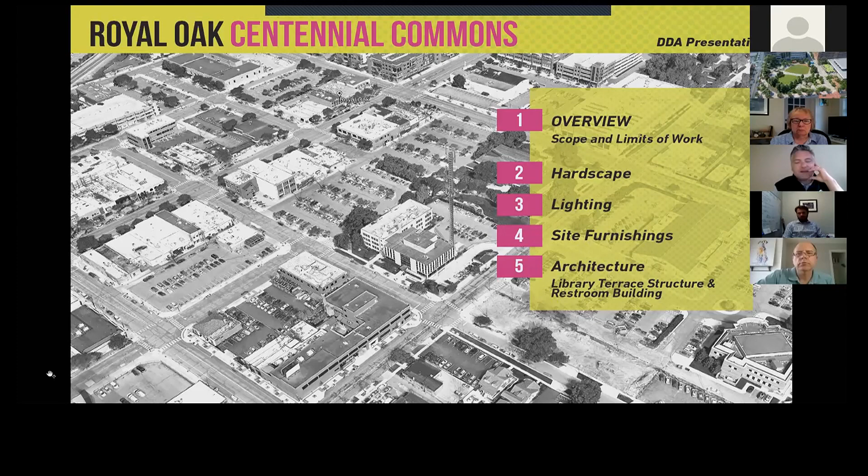Essentially what we've done is taken that concept design that we shared back in January. I think it was schematic at that level, and we've fine-tuned that and made it even better. All the elements you'll see in this—this is just kind of an outline plan of the CAD drawing, a lot of line work with score joints and things there.

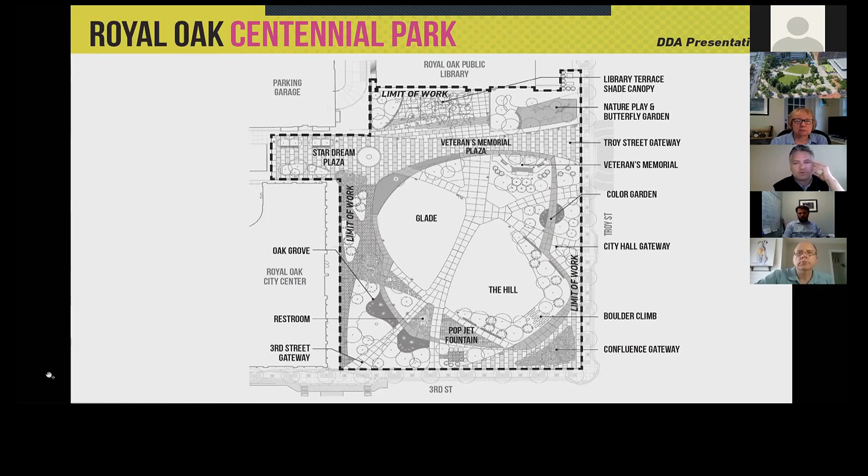But let's go to the rendering that we had done a couple weeks ago. It just kind of serendipitously happened with this meeting as well. We wanted some really good renderings to share the buzz of the project, and this meeting came up on the calendar, so it was a great opportunity to share these with you all.

All the programmatic elements that we had discussed all through the project—starting from community engagement, the charrettes that we had, what we'd heard at the food truck rally, and even working with the memorial groups—it's all still here, nothing has changed. We've only begun working on details, determining materials, which we'll go through later in the presentation. But really excited to share where we currently are right now.

We've got a couple of updates on some of the elements. The Library Terrace, for example, that phase was formally added since we last met, so we were able to advance it to the same level of design as phase one, which is the overall park. So we're looking at this all together now at this point.

So we've got De Leon and Primmer. Roberto De Leon will talk a little bit later about the architecture inspiration for the shade canopy there on the library terrace, and we'll also take a look at the restroom as well, that's adjacent to the pop jet fountain there for the convenience of families.

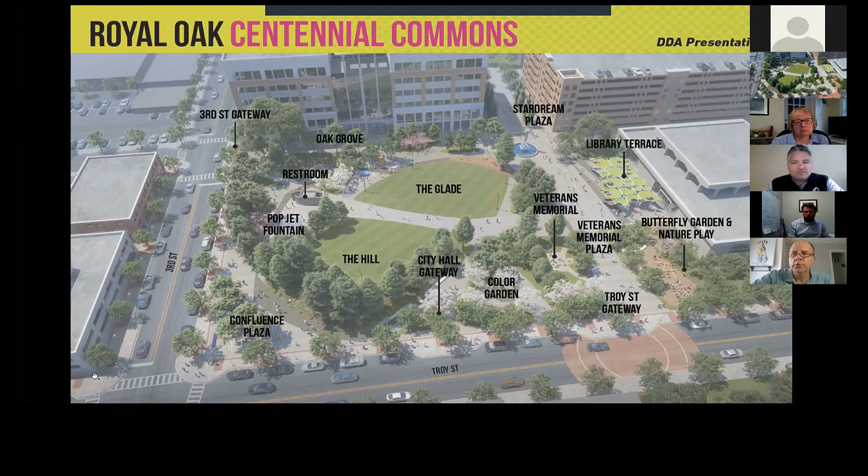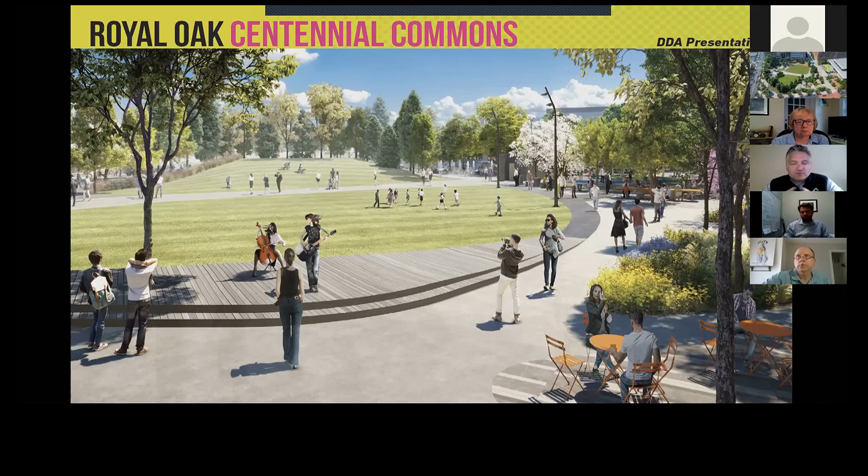So Kristen, let's go through a couple of other of these photos. You can see the stage here looking out over the lawn area. We've still got the hill within the plan, so we've got the topography changes. Lots of vegetation—we've done everything we can to keep as much vegetation as possible, so we get a lot of seasonal color and shade, and in this hot summer we've been running from shade to shade, so making sure we keep that within the plan. Then lots of activity surrounding this open glade in the middle of the park.

Let's take a look at the next slide. This is a view from the library terrace, looking down onto the promenade with the shade canopy in the foreground. So again, we're really excited.

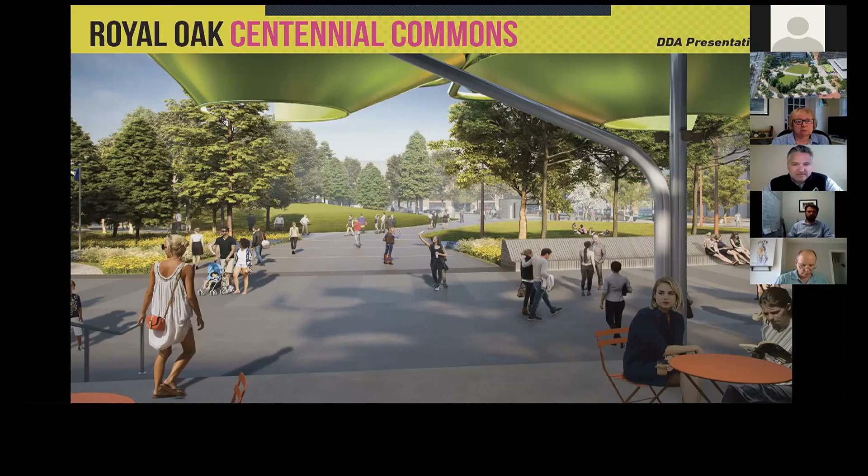We've got a lot of great details to share with you. Kristen and Haley are going to co-present some of that. They've been leading since the 30% design, really taken hold of this and advancing a lot of these details, working with Justin and Jen from F&V with De Leon and Primmer. It's been a really collaborative effort. We've also been in close contact with Aaron and John from the city, with regular meetings with them. Excited to share some of the updates with you here.

So this slide represents what we're calling the perimeter path. This is exposed aggregate and integral colored concrete. We wanted to have some contrast for this path from the rest of the more standard colored concrete for the remainder of the site, so it really pops out and has a different color to it.

Just to add on to that, Kristen—that perimeter path came from an idea from Emily at the library. She was really interested in having some sort of path that she could take her kids along to go through these different landscapes, possibly adding some signage within this for educational purposes. Also, the ring kind of derived from the outer ring circle of an oak tree.

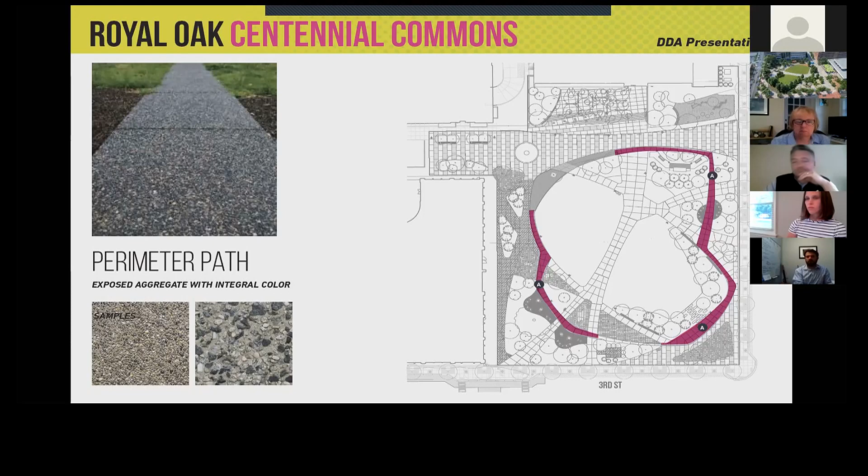Next, we have our unit pavers. These are concrete unit pavers located in seating areas. We have 3 primary areas where the pavers are. There will be movable tables, chairs, and trees as well, so it'll really be an interactive space where people can come and spend time and sit. They are also representative—there's a theme from the perimeter path carried through. This pattern is a DNA pattern; we've used the inspiration of an oak tree's DNA to create the pattern in the pavers.

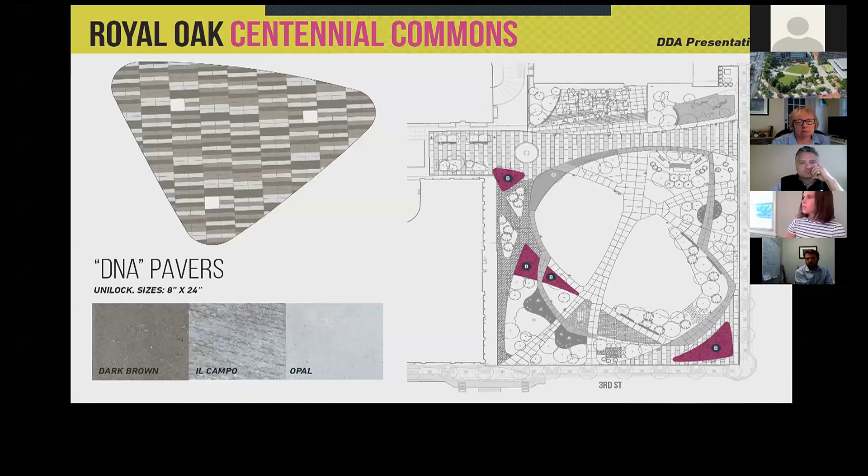Next, the bulk of the site is concrete pavement, and as I mentioned, there are different finishes where we have this banding or striped pavement. It is standard concrete with a buff wash or architectural finish to give it a crisp, nice finish, with seeded aggregate—black basalt seeded aggregate—that gives the banding the contrast you see here in the plan. The rest of the pavement is just a buff wash finish, standard concrete, for the remainder of the park.

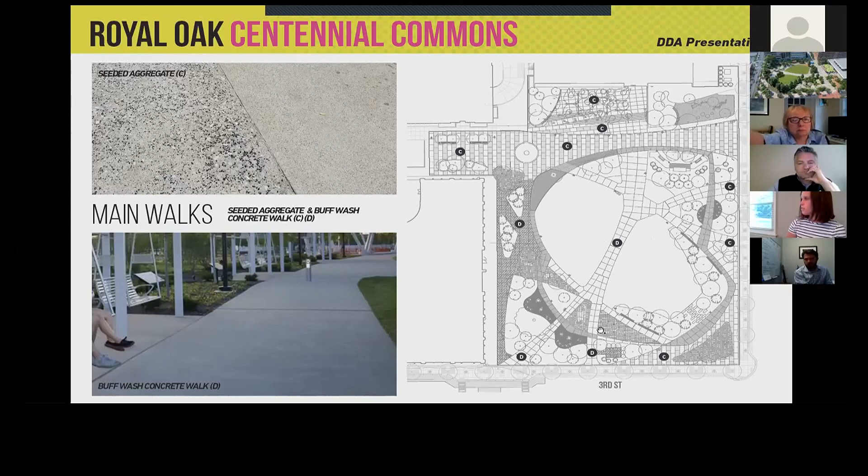So at the memorial, we have a second type, a very small amount of square footage—just over 200 square feet of cobble pavers. They are ADA accessible, but also have a texture to them for skate deterrent. So rather than raise the memorial, we've got about 8 to 10 feet, a pretty good stretch, of the cobble pavers to deter skateboarders.

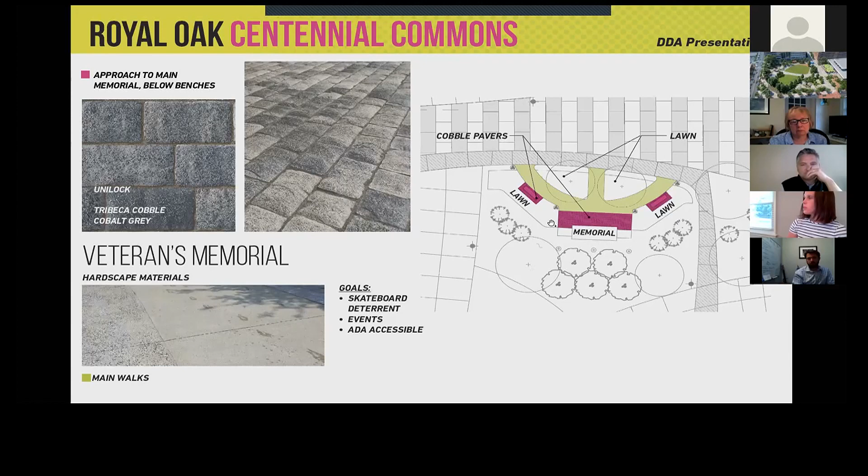And I am going to turn it over to Haley to talk about lighting.

Thanks, Kristen. Across the site, we try to address the different needs of each of the areas. Since this is a pedestrian scaled area, we wanted to have pedestrian lights throughout, shown there in yellow. We also have taller area lights for more of the event spaces, shown in blue, and those will be 25-foot poles with movable heads in several directions.

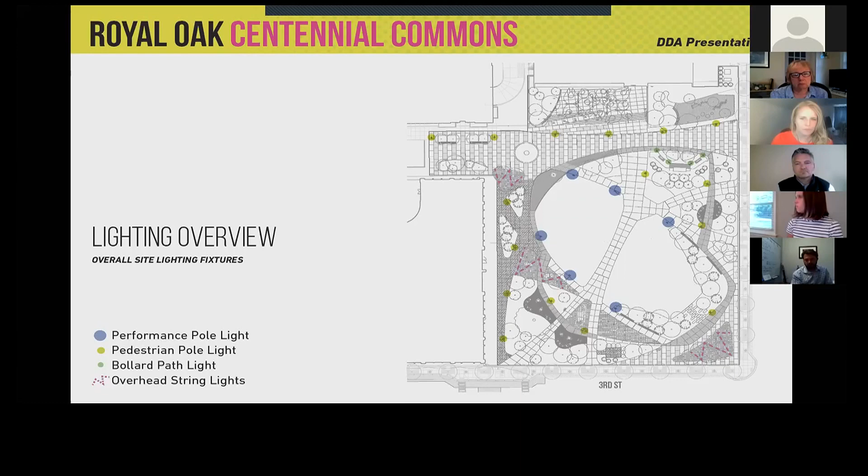If you go to the next slide, we can get into more detail. So here you can see those two that I mentioned. With the pedestrian lights, we wanted something that wasn't a globe fixture, which you see throughout the city, but something that would complement it. So this fixture really reduces the glare when you're walking around the space.

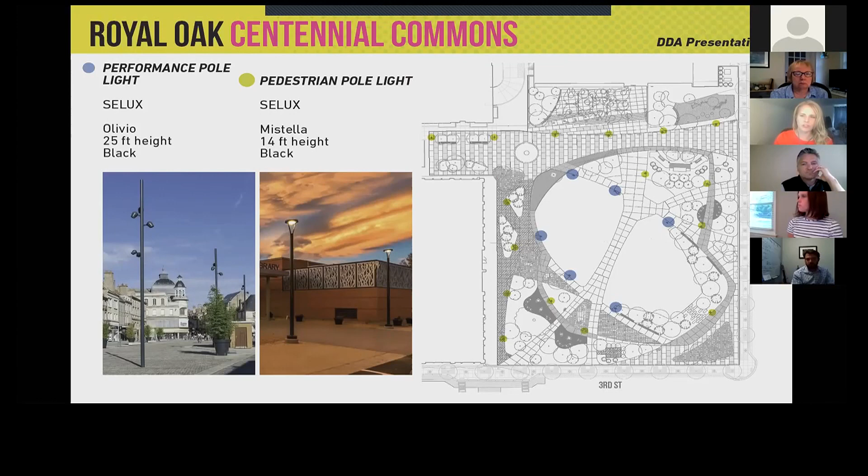And the next one. So a couple other lights we use around the Veterans Memorial area - we use a bollard light, which is more of a low path light. We think this will help to uplight and just have a nice ambiance to that memorial area.

And then for those plaza spaces that Kristen mentioned earlier, we are suggesting overhead string lights, almost like a festoon light, that would create those kind of cafe spaces and just add a little bit of whimsy to the area.

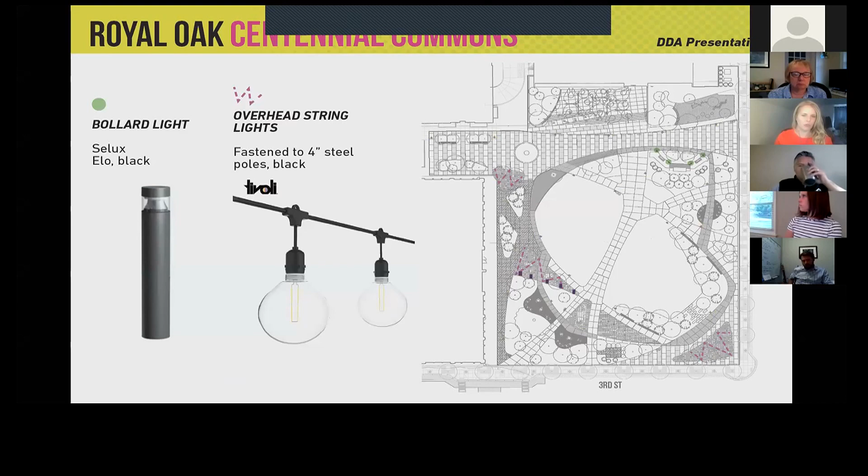The next one: site furnishings. As you can see, a lot of furnishings are used across the site. This was an opportunity for us to program those spaces into what we assume them to be used for, but also add a lot of punches of color that would complement the Royal Oak branding and also provide that whimsy that we'd like to see.

Some of our bigger furnishings - this is a built-in stage. You can see here it's about 1 to 2 feet, 2 steps up. But we wanted to ensure that at least one side of it could be ADA accessible, so if you go over to the right there, we kind of blended it in with the surrounding concrete.

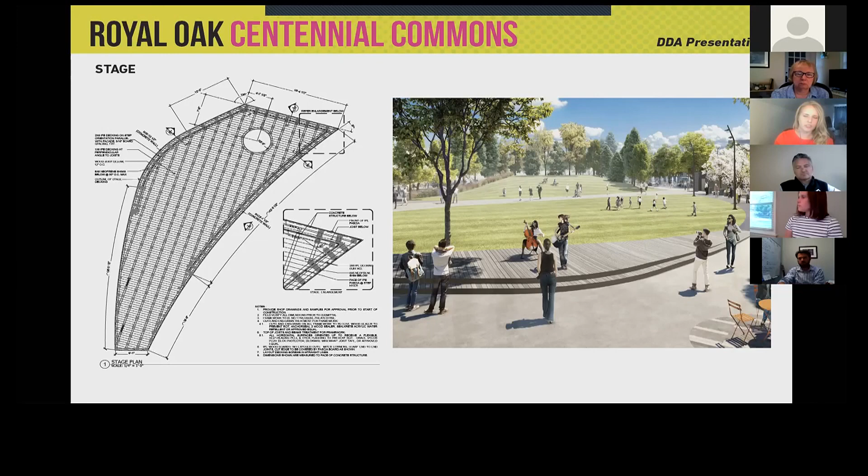Next slide - a couple of other custom items that we have designed. You can see to the left here, it's a curvilinear bench with a cast-in-place concrete base with an Ipe wood finish up top. This is extremely durable wood - you need special drills to drill into it. And then the feature bench, as you can see, is like a lounge type shape. It would really be a signature piece to this area of the park, and that is also covered in that Ipe wood slat.

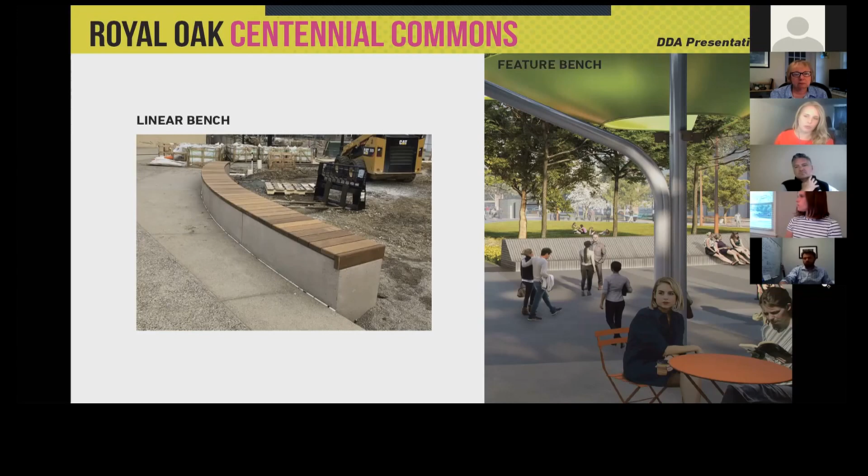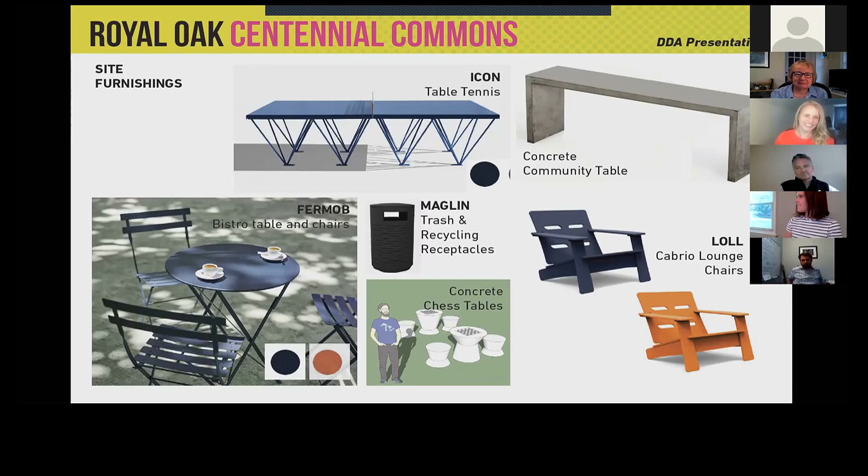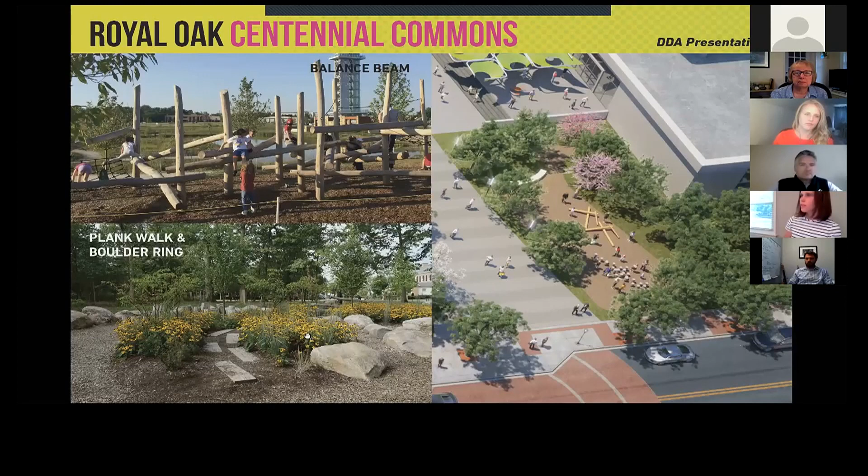Okay, and I guess I'll say next on the slide, whoever's... okay, if that's what, yeah, I'm not sure if we can share.

That's totally fine. Okay, so for the architectural components, we're going to talk about the canopy first, because that is probably the latest of the elements as far as development. I'm going to talk a little bit about how the design came to be and the precedents for that.

So much like the rest of the park thematically, the architectural components also draw on the precedent, largely inspired by the oak and the oak leaf in the case of the canopy.

That's really where we started with the canopy, looking at the defining characteristics of the oak leaf, starting with something familiar, and then transforming that into something more whimsical and abstract, but still keeping these defining characteristics of the oak leaf.

A key part of the oak leaf's characteristics are these deeply lobed, curvilinear elements. Also, the leaf itself is quite sculptural and three-dimensional, with an undulating surface. These deep lobes and the undulating surface are where the canopy design is drawn from.

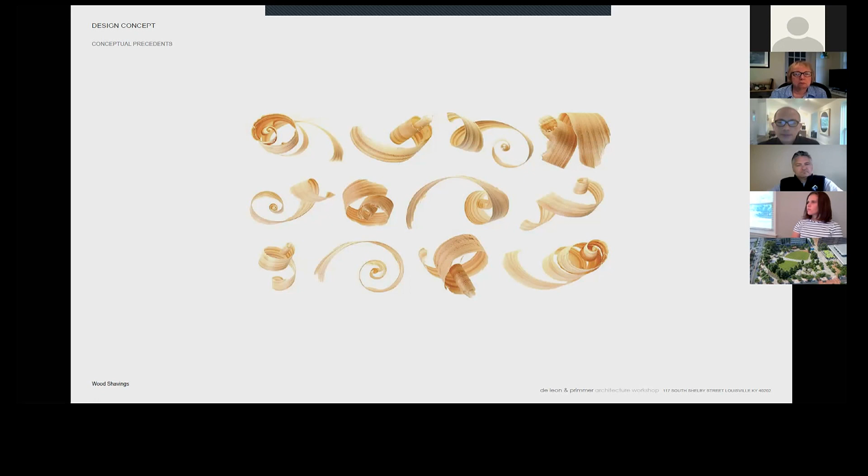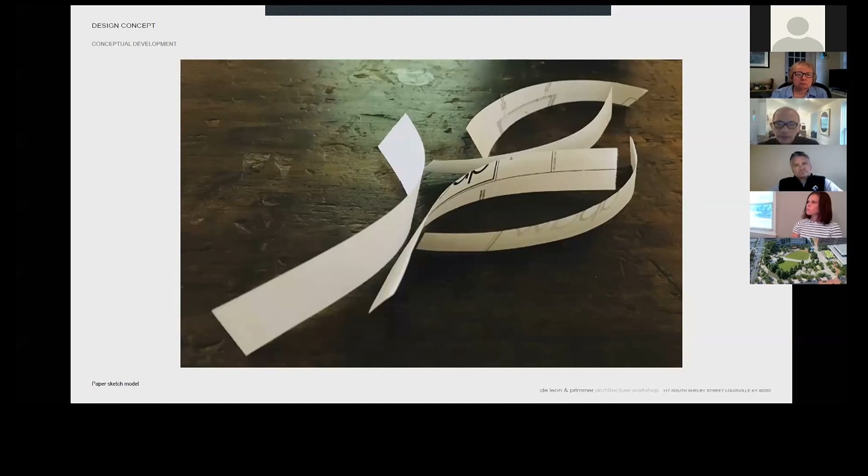These are very early concept models literally out of paper, trying to think how we can build this in the simplest way possible, even though it may look complex. We began to look at ribbons, imagining them as colorful steel ribbons, then developed that into a further iteration of curlicue shapes, again thinking about the deeply lobed leaves of the oak leaf and their three-dimensional quality.

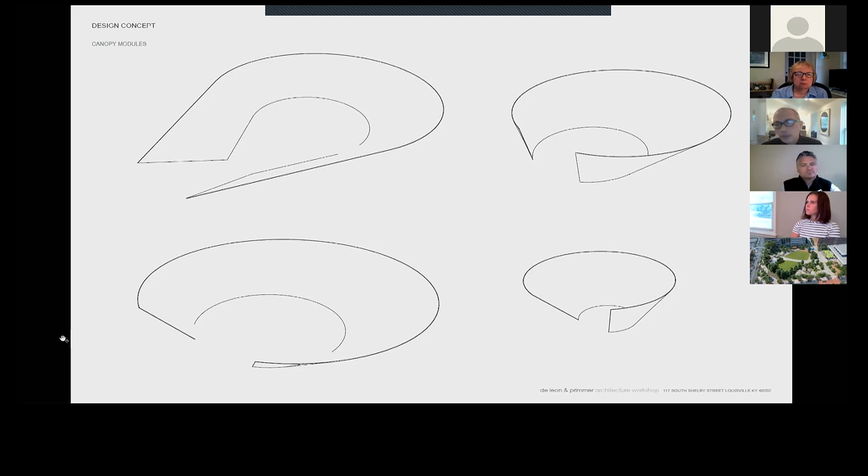In this next iteration, what we were after was creating larger areas of shade, so when we aggregate them, this is what it tends to look like — a kind of dappled shade underneath the canopy, evoking the quality of being underneath the shade of a tree.

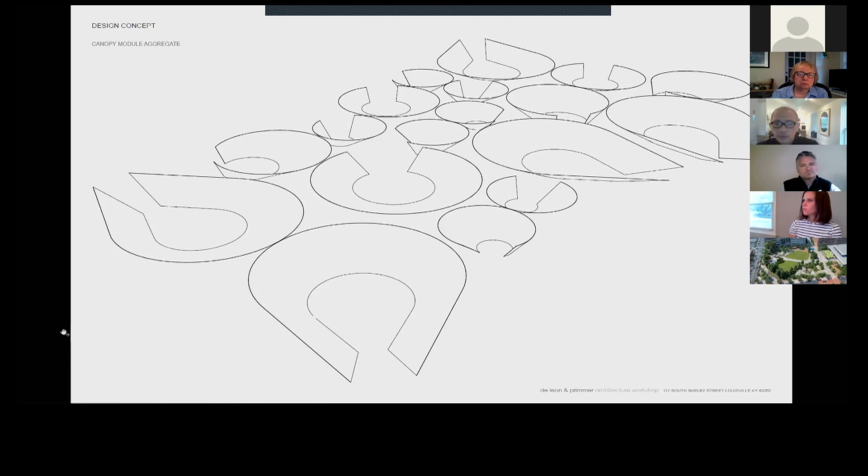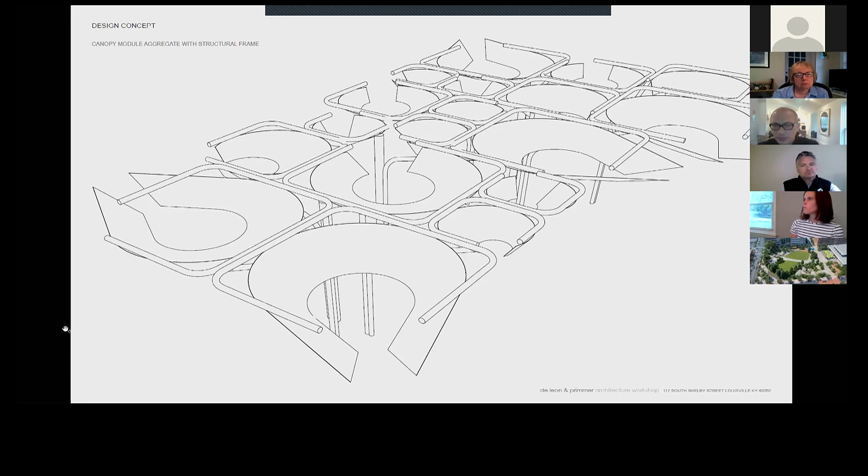These ribbons are then suspended from a series of bent steel beams. The key component here is that even though this looks complex, it's actually an aggregate of three sizes of modules of steel ribbons, beams, and columns — a repeated series of modular elements.

What we're after here is this dappled quality of shaded light underneath the canopy, but also we're trying to minimize the amount of columns it's supported by, maximizing the flexibility of how the space underneath can be used.

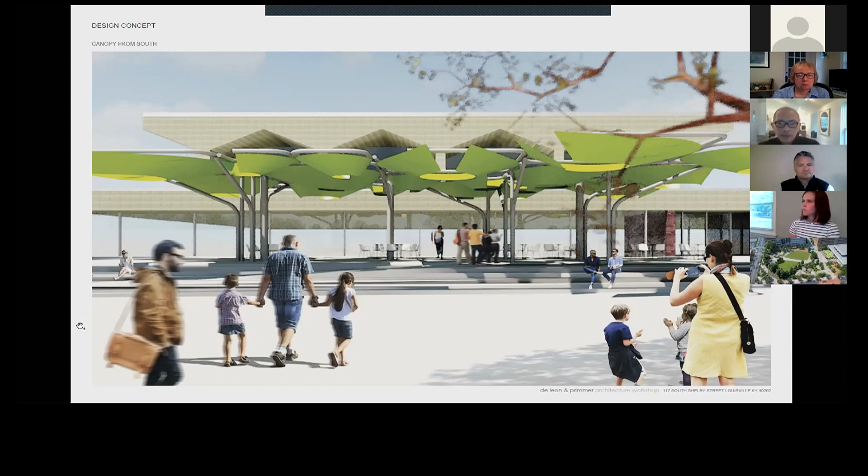And then the smallest of these is 8 feet by 8 feet. This may be hard to get a sense of scale, but when you think about 8 feet by 8 feet, that's almost the size of a small room.

Again, we were trying to look at not just providing shade, but also a certain amount of square footage for actual rain cover. Within this total square footage, we have a little over 1,400 square feet of actual covered canopy space. That translates to rain cover for about plus or minus 97 people, allocating about 15 square feet per person. So there's a generous amount of rain cover underneath this canopy.

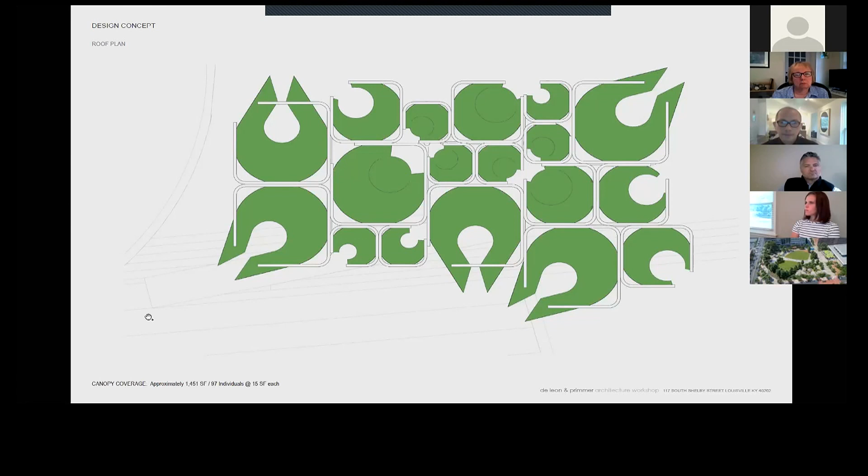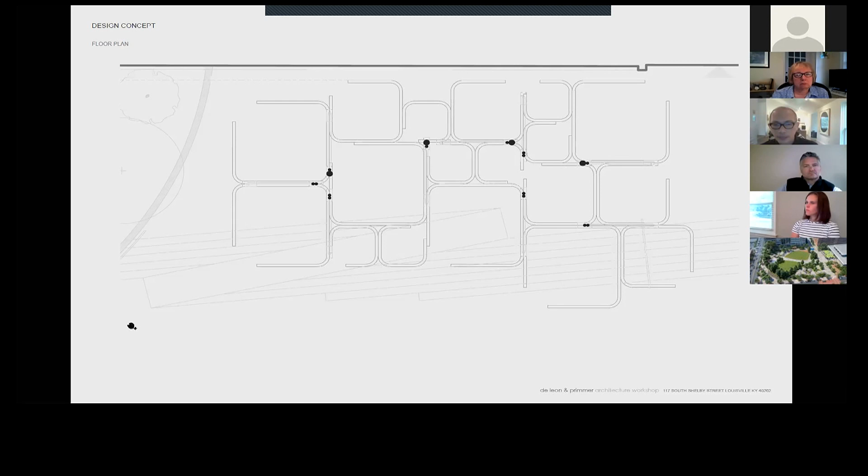Next slide. This is a floor plan of the terrace, library terrace floor. The darker dots you see are where the columns land down onto the terrace surface. We're trying to minimally touch the terrace floor and maximize the flexible use of the terrace area. The squiggly lines in lighter shade are actually the beams above, not on the ground surface, just a frame of reference, so you can see where the canopy or ribbon elements are supported above.

Okay, next. We can go through these very quickly, but these are more dry drawings. We wanted to show you the thinking through the development of this canopy element, looking at an abstract or organic shape that looks complex, but in reality is a series of aggregated modules. This is just a series of floor plans, roof plans, and a reflected ceiling plan.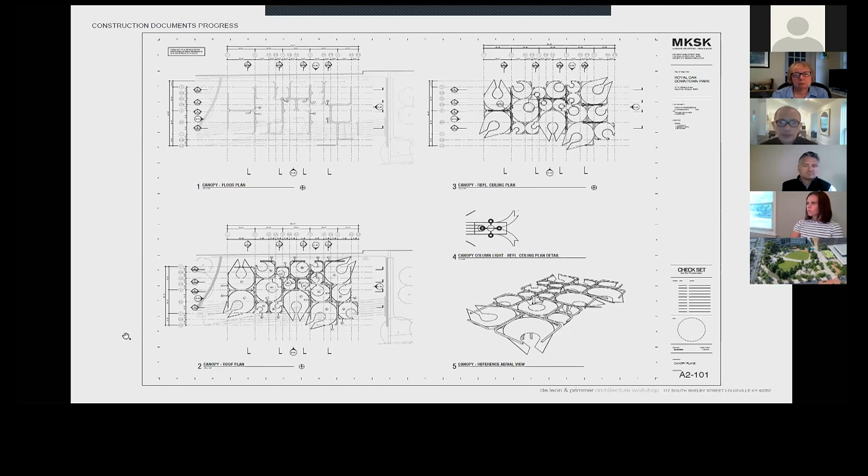Okay, next. These are elevations, which I think the renderings describe better. Let's just go to the next image. And these are sections, again more technical drawings, but let's go to the next image.

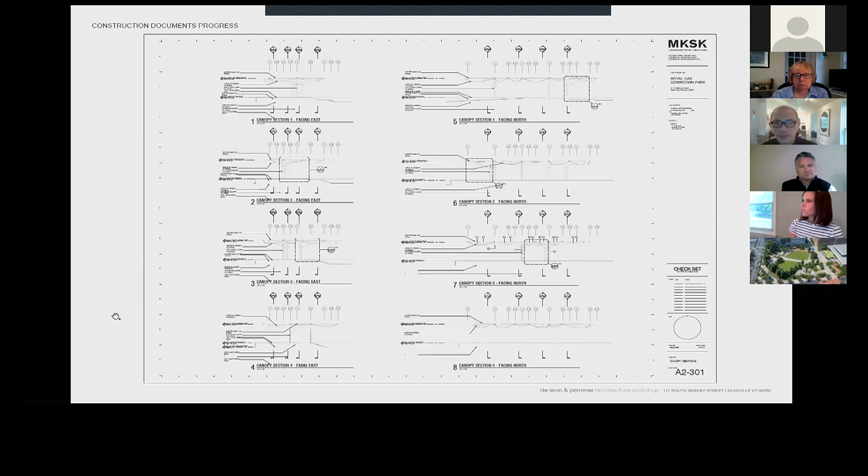This just shows that the columns are comprised of basically 2 types. It's a column cluster. These are then connected to footings, concrete footings, which are below the library terrace surface.

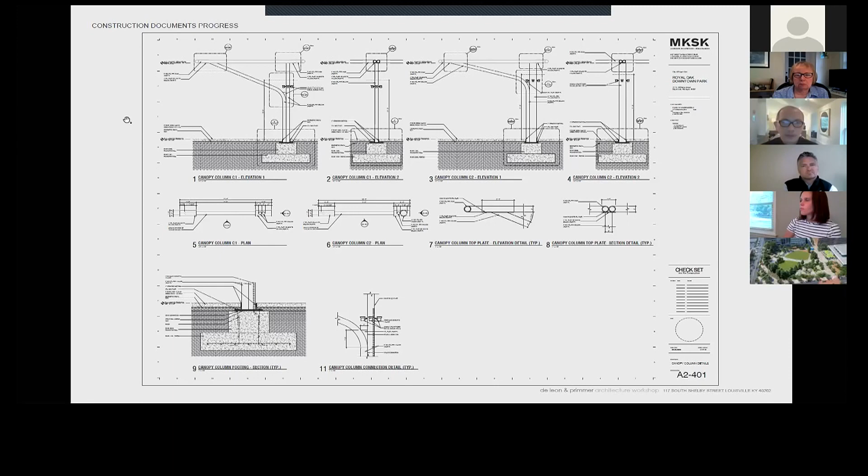Okay, next. This sheet shows the four basic modules for the ribbons, showing how they are formed from a laser cut template and then assembled and repeated. These are what those colorful ribbons are comprised of.

There's also a series of variations within these, an open version and a closed version. The closed version is trying to increase the amount of actual rain-covered area underneath this canopy. The intent, in terms of repeatability and modularity, is that this canopy structure is essentially minimal or zero maintenance. There is really no maintenance required. The color would be a baked-on finish, a very durable finish, and the intent is that rain just washes off of it. Again, minimal to no maintenance for the canopy.

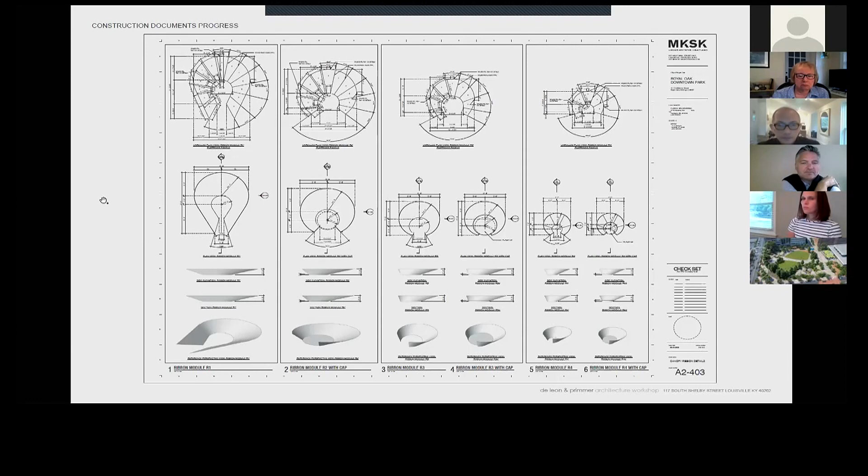Yeah, Roberto, I'm sorry to interrupt. You designed these closed ones with a slight slope so water's not going to pond, right? There's no... Absolutely, this is actually sloped to drain. So this is not holding water, it's allowing water to drain off to the sides of each of these modules. Thank you, Annie, for reminding me.

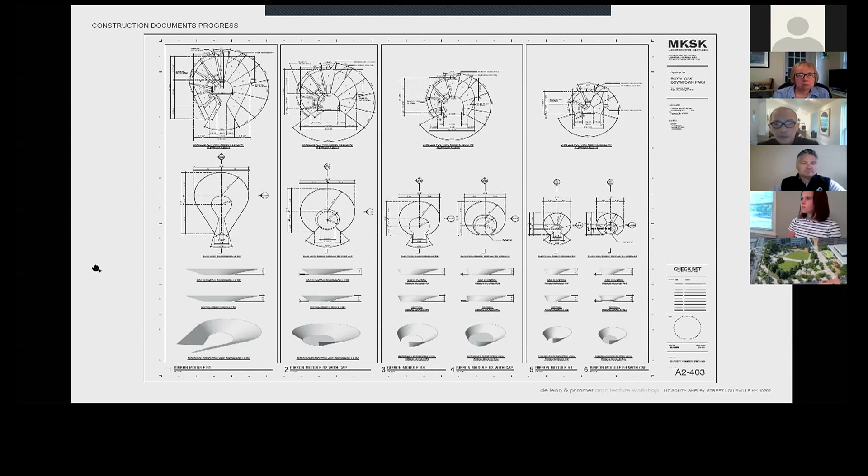So the restroom design, and maybe Caroline can talk about this, but I'll kind of describe it. The design is, I think you may have seen this in a previous version where we were looking at glazed brick, but the surface basically draws on the kind of irregularity of oak tree bark. So the intent is that the actual brick walls will transform from day to night, from natural light, the way shadows form on it.

It's actually a fairly straightforward brick wall, but the way they are rotated forms this intricate, complex patterning of shadows that transforms throughout the day because of how natural light falls on it. Caroline, did you want to talk a bit about this or add to it?

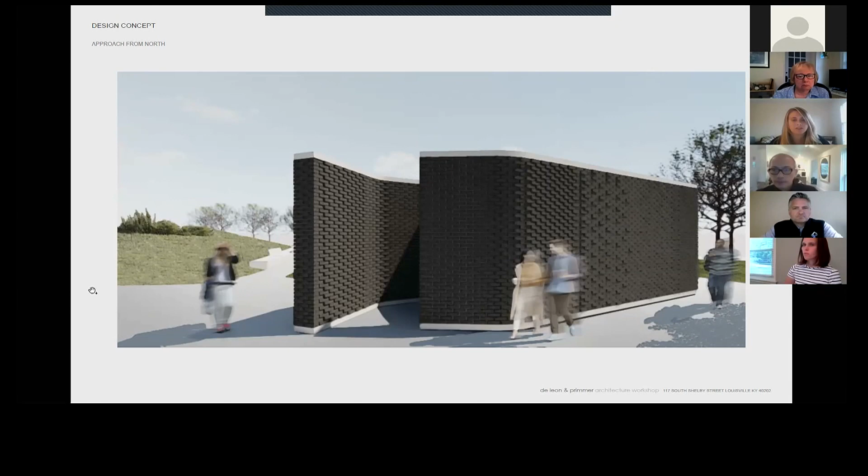Yeah, if you go to the next slide, you can see a close-up of that detail. The bathroom has been designed so that no matter how you approach it, whether from the north or the south, you're going to get that effect regardless, seeing the shadows and the serrated edge and how it changes throughout the day. That was definitely an important feature when we were designing this.

So again, just like with the canopy, we started with something familiar and abstracted it, drawing on a sense of whimsy and wit. The other challenging aspect of the restroom building is that there is no backside to it—every side is essentially a front side. So we really had to think of this as a building in the round, where there is no bad side to it. That's the design intent of this custom brick patterning.

I think that's actually the last image for the architectural components.

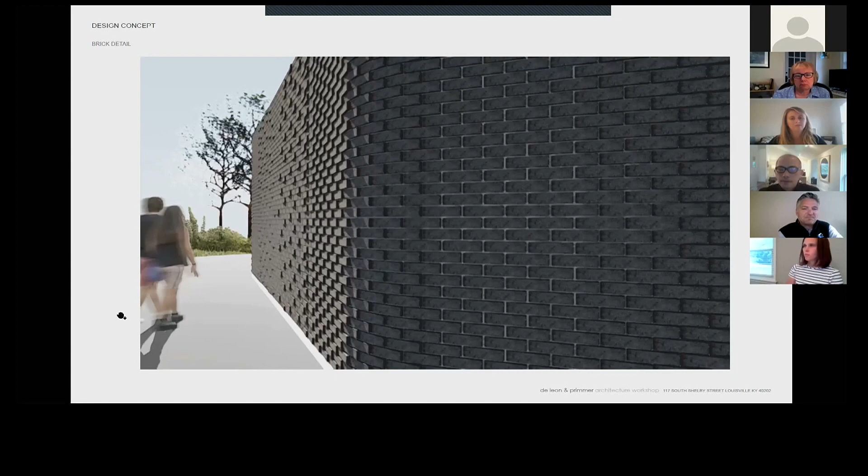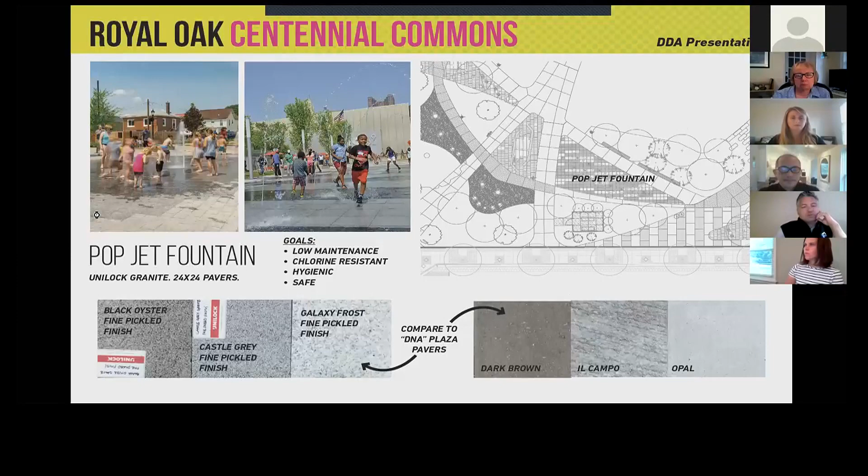Thank you, Roberto, and the rest of the team. So that's a summary—there's a whole bunch of information we glossed over, a lot of it details similar to the construction sheets Roberto was sharing. We've got a lot of those. We are very close to having our set ready for completion to go out to bid at some point. Everything's on schedule. We've been checking all along with our budget, and we feel comfortable with that. So at this point, if there are any specific questions about anything, we've got our team here, happy to address that or talk about next steps.

Okay, thank you very much.

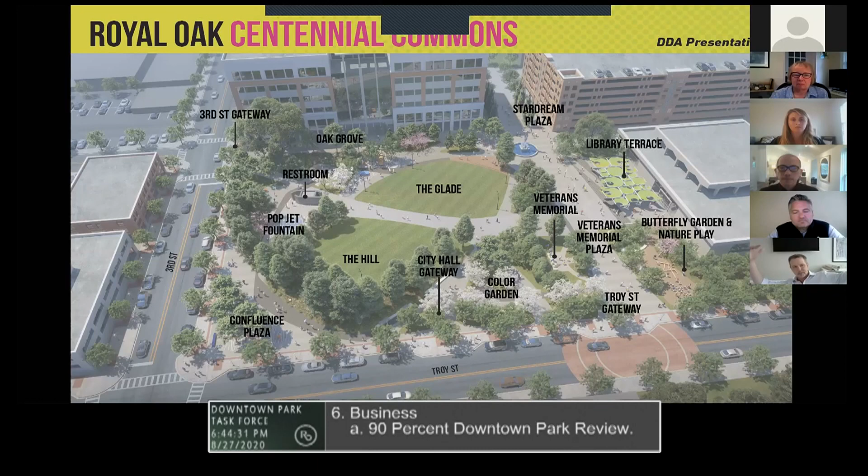And so right now, the trees that are out around the memorial, there are a lot of trees, and they're shade trees, and I think it does create a good environment. So you saying that makes me realize that could work, because it will not be impeding line of sight per se, but for a small trunk, and it will give shade, which I think would be very important. If there were zero trees, that would probably not be comfortable in certain times of the year. So thank you for that explanation.

Sure. And I just wanted to add, this is Kristen, we'll make note to make sure that we provide the right species to get that limbed up canopy as soon as they go in, so we'll have them at a larger size with the limbs up form. Well, when they first go in, Kristen, they're going to be so small, you're going to be able to see through them anyway. I think it's a little bit older as it continues to mature, that we have a pruning program. And that's one of the things that we'll want to work with the city on, is developing a maintenance plan.

This will be a park that's different than some of the other parks that you have. So there may be a little bit of a difference in terms of maintaining. And we want to make sure that you all aren't just off running on your own, that we consult with you all and make sure that we've helped you along the way. Because the maintenance of this is just as important as day one opening. The maturity of it is only going to make this park continue to get better every single year.

Okay, first I've seen Tim's hand and then Sarah's. So let me go first with Tim and then Sarah.

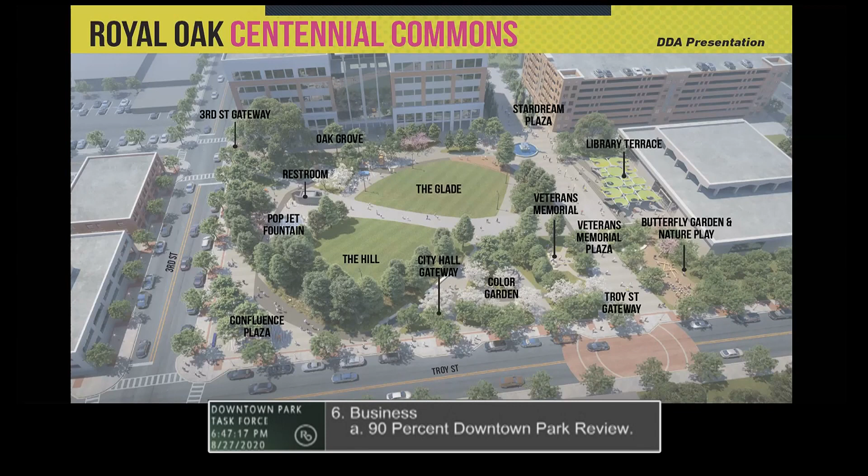Love all of that. I also agree with Tim about having some separation between the children and the memorial. So I think that we should really consider how we plant those trees and what we're doing with those. Other than that, I think it looks absolutely stunning and can't wait to actually start going there. So congratulations. And we just want to clarify for those that may be concerned, the nature play area is not a schoolyard playground.

Right, it's a passive, low intensity play. And I believe there's play that's there now with the bee, and we're keeping the butterfly garden there as well. So it won't be a hustling, bustling, theme park type of experience. It's going to be mild and low key, just an opportunity for kids to come out and burn off a little bit of steam while they're in the library.

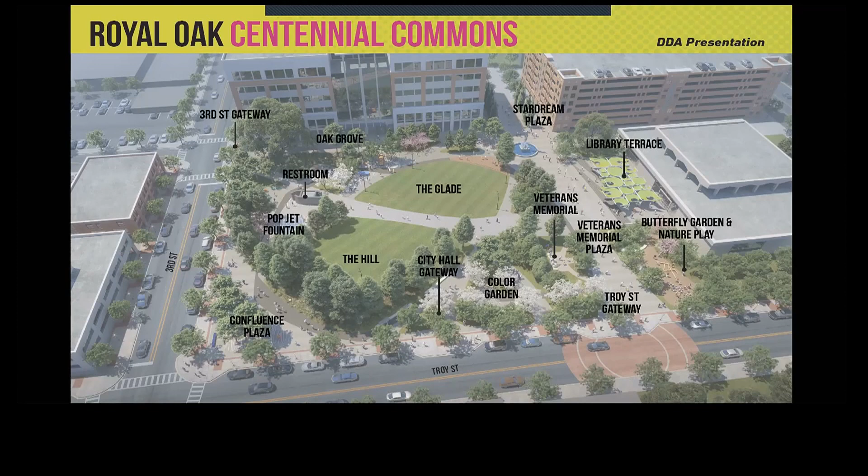The bathroom won't be climbable. Didn't we see a design where the bathroom walls were climbable? We skipped that, right? We're past that. The bathroom walls, no, they're not climbable. The extrusions, correct me if I'm wrong, Roberto, are just enough to give it that texture. Okay, not enough that you're going to climb it like a climbing wall. Did we have a design where they were like a climbing piece, like it was part of the design? They only protrude half an inch outwards. Okay, I just think I'm remembering something else. I think the one that had the much higher elevation, we had climbing on it or something a long time ago. Love it, perfect, thank you. I appreciate all your help and answers.

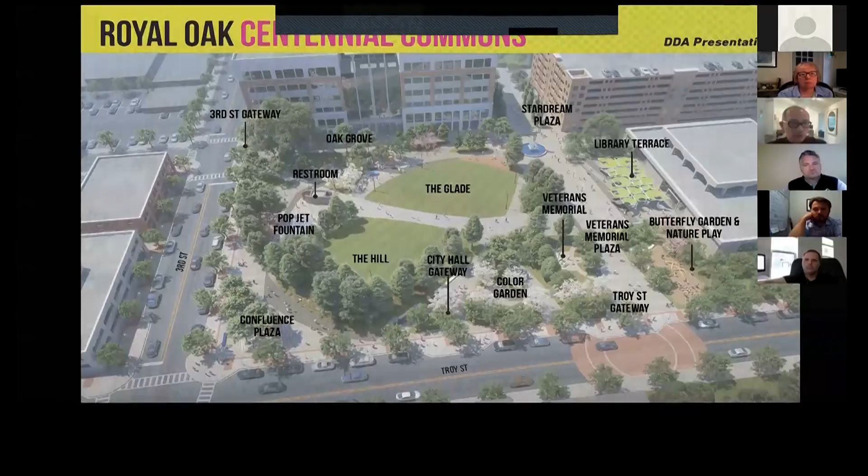It's kind of a catch-22 in terms of what you want to see from the park paths. Sometimes it's not desirable to see the front door into a restroom or utility building, so this strikes a balance between the two. Depending on where you are in the park, you might not see that front door, but if you keep walking, it's a full frontal view of that door. You're never fully hidden within that vestibule area. I'm hoping I'm explaining that clearly enough.

The only thing I'm throwing out there, from a security perspective, is my concern that it's obvious whether somebody's occupying it or not, and if they are, that it's not used in a fashion none of us want to hear about. Those are my only comments. I'm good with the design. Just my two cents. Thanks.